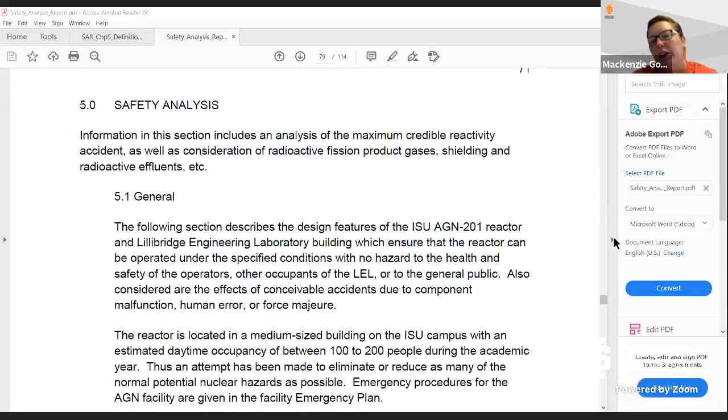Okay, so let's talk about SAR Chapter 5. A lot of what we've already talked about with the safety analysis report is a whole lot of information that tells us about the reactor, about the instruments, about the physical location, and the geography and weather that affects the reactor. But the safety analysis report wouldn't actually be providing us an analysis of the safety levels of this reactor if it didn't look at accidents.

When a safety analysis report analyzes specific accidents, they have a criteria called the maximum credible. So what they're going to do is look at the typical types of accidents that affect reactors, and figure out which one is the most severe that is still likely to occur. So it's the maximum, but it's also credible. We're not going to imagine that instantaneously every safety system, every shielding system, and every passive safety feature we've put in the reactor just completely disappears, because they won't instantaneously all do that.

That's not credible. But we are going to look at the maximum of what can go wrong—all of the things that are active, for example, we'll say fail. And then we'll look at what temperatures and radiation releases we get, and that's our maximum credible.

For the AGN reactor, the type of accident that creates the maximum consequences is a reactivity insertion. For many other types of reactors, especially commercial reactors, there are multiple types of accidents that have to be analyzed. So there's the maximum reactivity insertion, or RIA accident—reactivity insertion accident. There's also loss of coolant accidents, LOCAs, that have to be analyzed. We don't have a coolant pumping system, so we don't have to look at a LOCA. We don't have any active water going out of the core to look at. So that's not a credible accident.

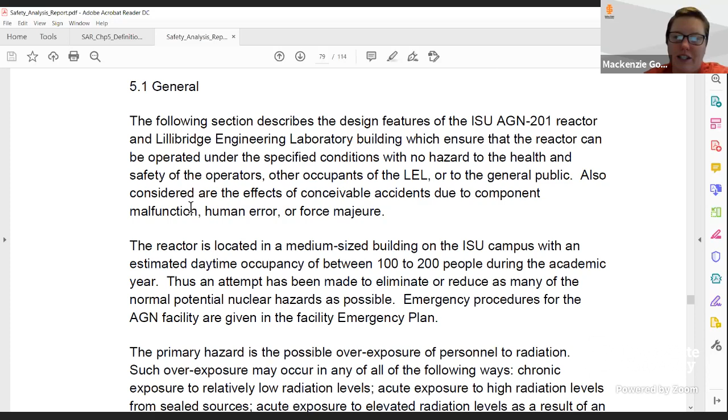So, this section describes the design features which ensure that the reactor can be operated under the specified conditions with no hazard to the health and safety of the operators, the other occupants of the building, or the general public.

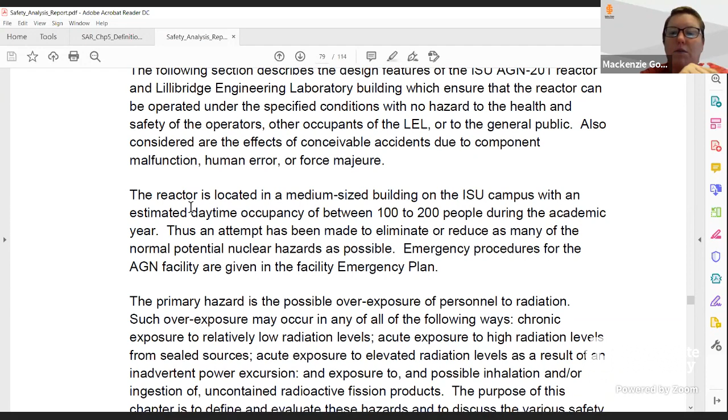As we start to get into our accident analysis, there are going to be certain assumptions. So this occupancy, 100 to 200 people. There's an emergency plan that says we will evacuate after a certain amount of time. There are going to be limits so our systems can detect reactivity being inserted too quickly or temperatures rising too much. As we start specifying the assumptions we have to have to ensure this accident is actually controlled, this is where we start connecting to our technical safety requirements, or the TSR.

Out of the accident analysis in the SAR, we're going to connect to the requirements we have to keep the system to that are specified in the TSR. So our SAR and TSR, even though they're separate documents, are related and create the safety envelope in which our reactor exists and operates. That's why we're talking about the SAR and TSR in the same session as we talk about the end of the SAR. Does that make sense?

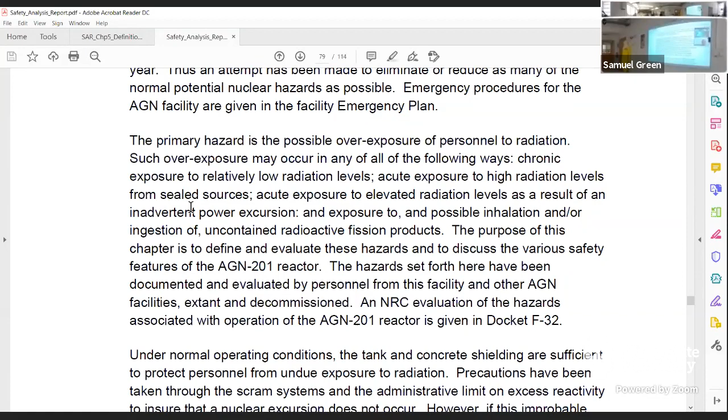Under normal operating conditions, the tank and concrete shielding are sufficient to protect personnel from undue exposure to radiation. So you can expect some requirement in the TSR that the tank, with its water and concrete shielding, actually has the right amount of water in order to operate the reactor. It's saying this item provides this protection, therefore in our TSR we have to protect that structure because it is essentially credited for providing safety, okay?

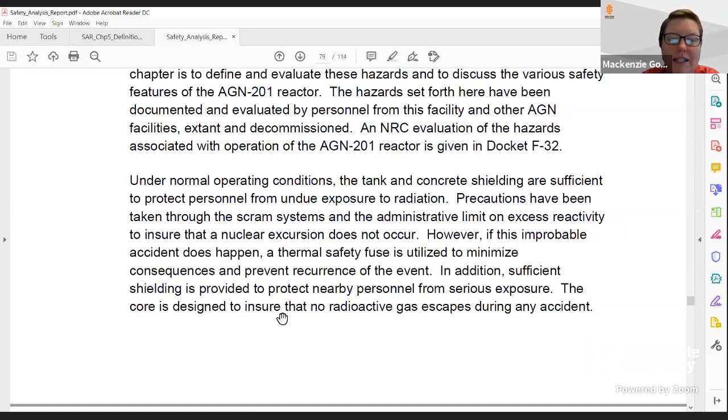The scram system and the administrative limit on excess reactivity ensure that a nuclear excursion does not occur. However, if this improbable accident does happen, you're going to rely on the safety fuse to melt, separating the core, which will prevent continuing reactivity insertion and avoid continuing or maximum consequences, preventing the event from recurring. In addition, shielding is provided to protect anyone nearby from serious exposure to radioactive gas during this hypothesized accident. So you should also expect in the TSR to see requirements about the design of the core tank to hold radioactive gas.

Back to some of this discussion on reactivity as we start talking more about reactor theory. In the text reading, I think Tucker does a really good job introducing reactivity in simple and straightforward terms, and the quiz up in Moodle talks a little about some of those questions. If you've done the reading in the first few chapters, chapters 3 through 5, he starts really talking about this—it's a really good introduction. We'll get a little more detail.

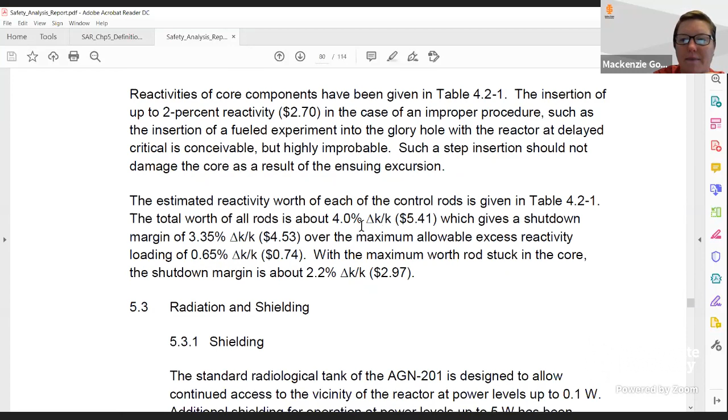The reactor physics portion of the NRC exam does require you to make some calculations with reactivity, so we'll get into that. Essentially, what it's saying is that the total worth of all the rods here is 4% delta K over K, and the insertion of up to 2% delta K over K, which would essentially be improper, should not damage the core as a result of the ensuing excursion, right?

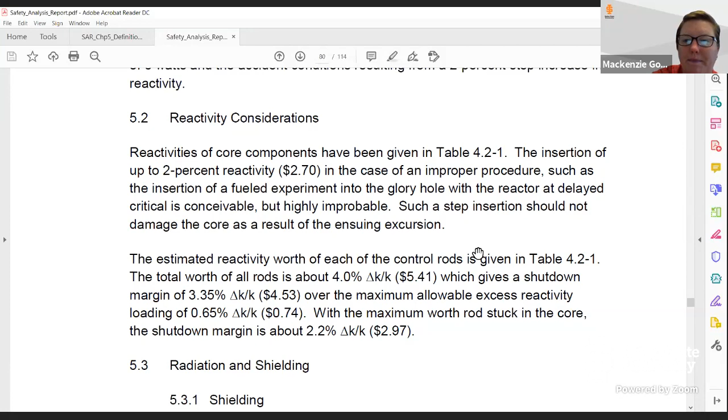So when we talk about the allowable excess reactivity loading, what we're saying is we're trying to prevent any part of the core from having enough reactivity to reach this 2% that we're talking about as our accident, okay? We don't have enough extra here. We have quite a bit more in all the rods together, but none of the rods get to move all at the same time, right?

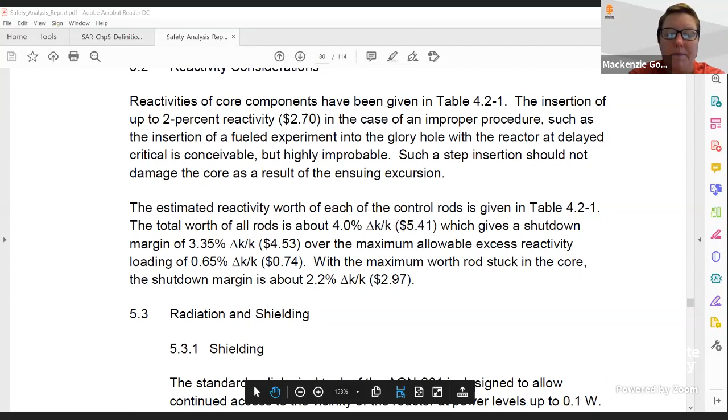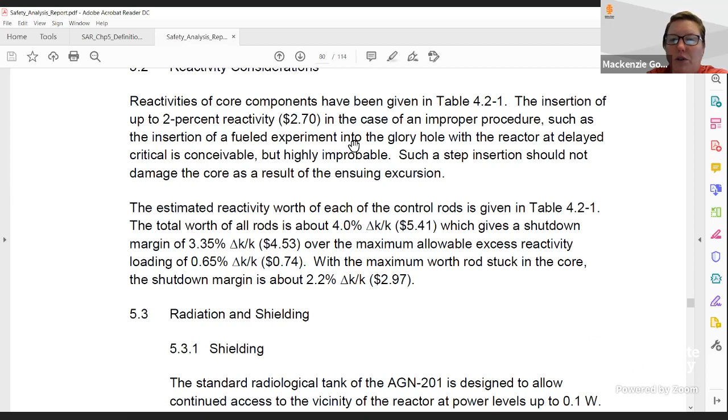As we talk about some of our TSRs and interlocks, we are preventing the coarse control rod, fine control rod, and both safety rods from all moving at once so that we're never inserting this. So it wouldn't be the control rods giving us that problem—it would be an improper procedure or a fueled experiment in the glory hole, right? Still improbable, but that's where we could get this reactivity.

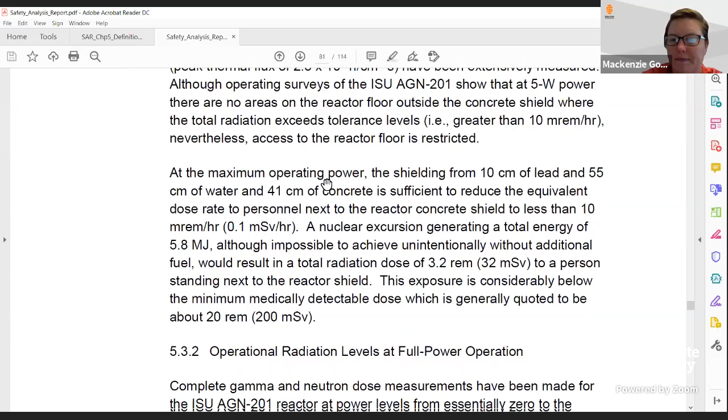When you guys read through this, did you have any questions about how the shielding and the reactor protects you, whether you're at the control station or in the building? Okay, I'm going to take that silence as you got it.

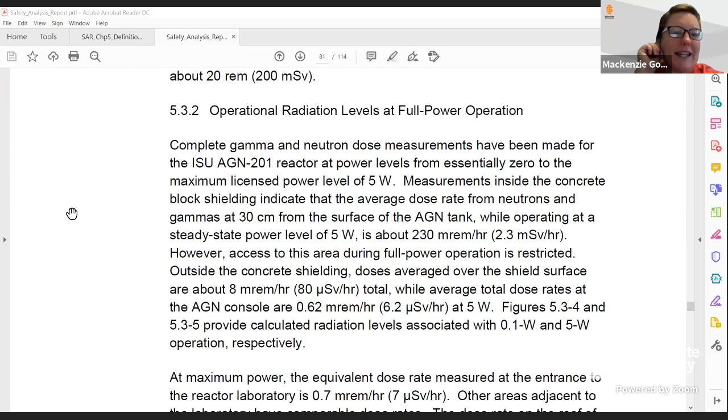So our maximum licensed power level is 5 watts. What is the dose we get while operating at that steady state level? At 230 millirem an hour. This is in the concrete shielding, right? We don't actually ever get exposed to that. We get exposed here at the console to this 0.62 millirem per hour. This 230 millirem per hour is why there's a high radiation sign that prevents people from walking behind into that concrete area.

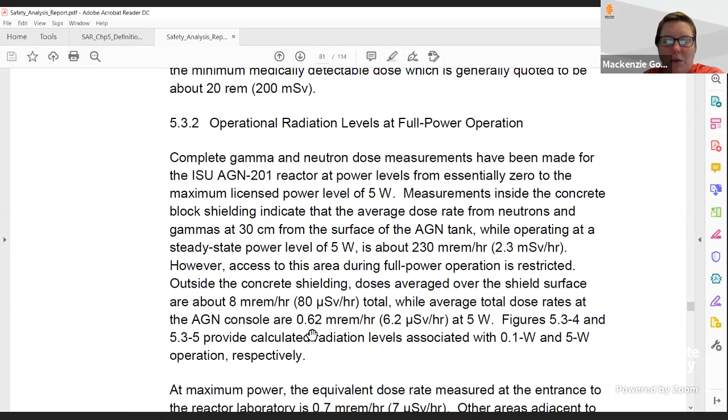Right outside the concrete shielding, the shield surface gets 8 millirem. So inside the surface, 230; on the outside surface, 8. That's a huge reduction that our shield gives us. And then, of course, once we're actually at the console, it's less than 1 millirem per hour.

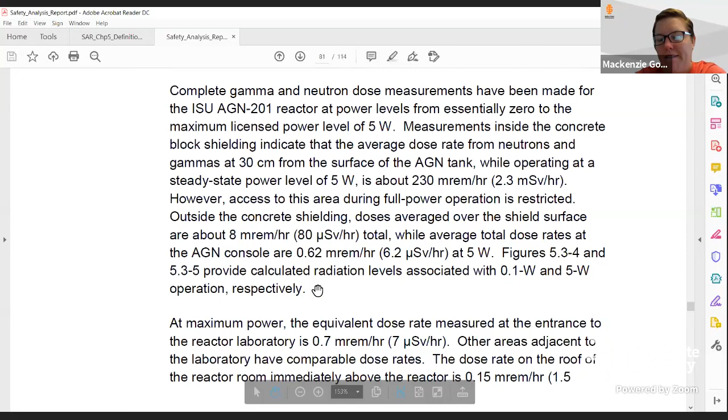What's interesting is that the entrance to the reactor laboratory has a slightly higher dose rate at max power. If you think about how that facility looks—Marcus and Sam, when you guys go in tomorrow, take a look at this. And Christy and Sue, the direction that the opening from the concrete shielding faces versus the complete wall that faces the console is why we have that slightly higher entrance dose rate. You know what I'm talking about, Christy and Sue? I think so, yeah. Okay.

Can you repeat what you were talking about just now?

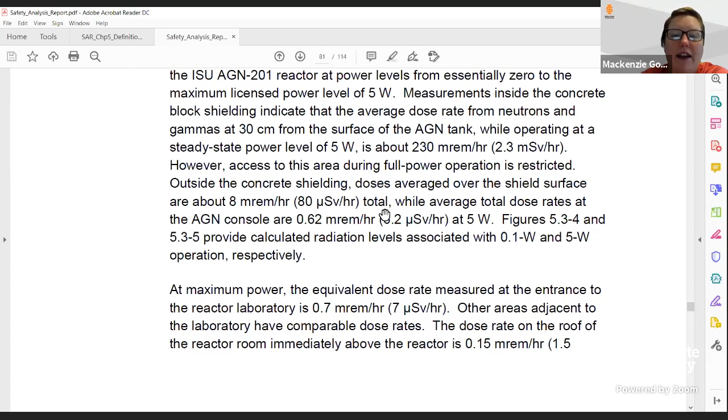Because of the shape of the concrete, that little puzzle entrance, essentially right where the high radiation rope is across, the opening actually points more towards the entrance. So you get slightly higher dose at the entrance to the reactor lab, whereas it overlaps and completely covers the console, so you have a slightly lower dose at the console. So when you guys get there tomorrow, Sam and Marcus, take a look at how that concrete shield wall is shaped, and you'll see why it protects the console more than people standing at the door.

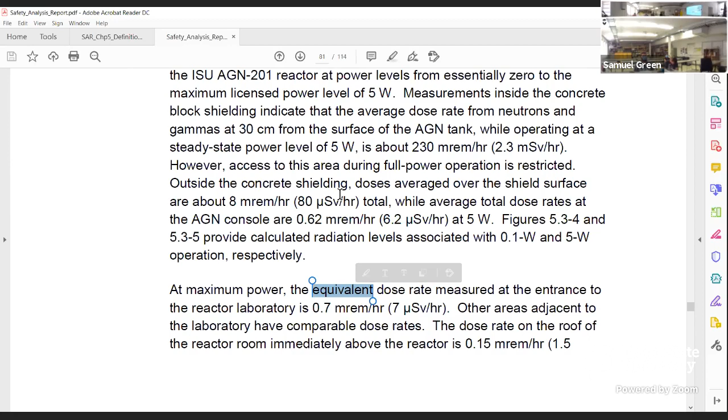When you do the walkthrough portion of your exam, where essentially you're taking the NRC inspector physically through the facility and explaining to them everything you know about the facility, this is extremely important information, and this is stuff that I highly recommend you have committed to memory.

Know the dose rate from the neutrons and gammas from the surface of the tank. That's at maximum steady state power of 230, and we restrict access to that area, so no personnel get that dose. Outside the concrete shielding, we're at 8 millirem per hour, and once we get to the console, it's at 0.62 millirem per hour. Because of the shape of our shielding wall, it's slightly higher at the entrance, but still extremely low at 0.7. Being able to explain that to the NRC inspector, why there's a high radiation boundary across the entrance to that shielding area, and why personnel are not allowed back there when the reactor is operating at high power, will be extremely important concepts to convey on your walkthrough exam.

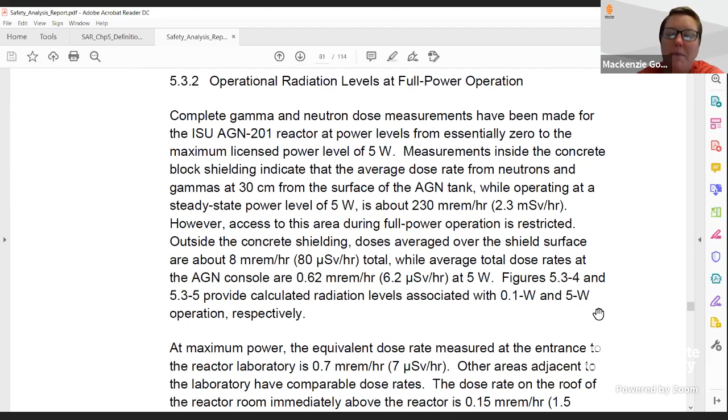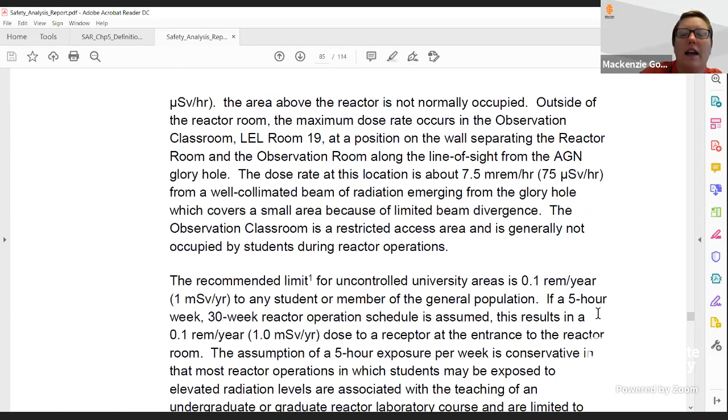Then it talks about some of the same information for the area above the reactor. The recommended limit for uncontrolled university areas is 0.1 rem per year to any student or member of the population. So then it talks about if you have a 5-hour week, 30-week reactor operation, the dose that comes off at maximum power that leaves the reactor lab would be essentially that 0.1 rem per year at the entrance to the reactor room. That's how we assure we don't ever expose normal students who aren't operators and aren't monitored for radiation to radiation levels.

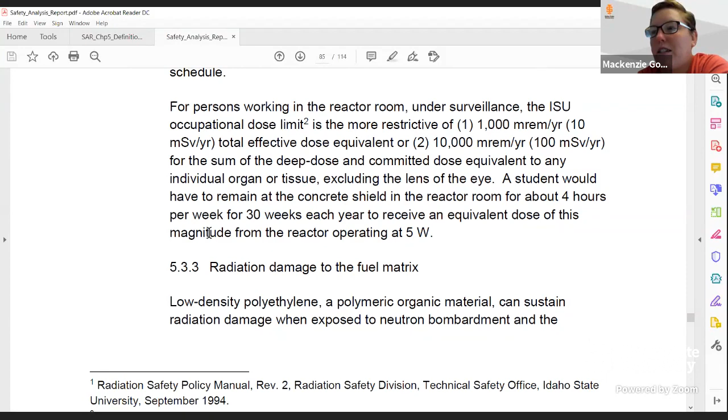ISU occupational dose limit, right? 1,000 millirem per year. So is this higher or lower than the DOE or NRC limits we've talked about in class before? Lower, yes, much lower. Even though we have that 5 rem per year that's the NRC requirement, we have a limit at ISU of 1. Do you guys remember what that's called when you have a lower limit set by your company than the limit that's legally allowed? Administrative control... yeah, it's our ACL, our administrative control limit. You also need to have that memorized. You need to know what our ACL is at ISU.

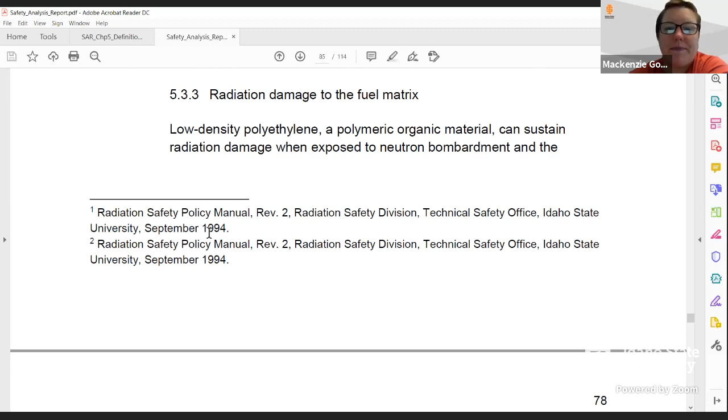One of the interesting things in the accident analysis is radiation damage to the fuel. We have low density plastic that reacts differently than the metal you typically see in most reactors. It can sustain radiation damage when exposed to neutron bombardment and radiation emissions from decay fissions. So Aerojet General Nucleonics put 50 samples of the core into this test reactor at Argonne National Laboratory, Chicago Pile 5, in a higher flux than we get at the AGN, for a week. Essentially what happens when that plastic fuel is damaged by radiation is the density is reduced and hydrogen is lost from that polyethylene matrix.

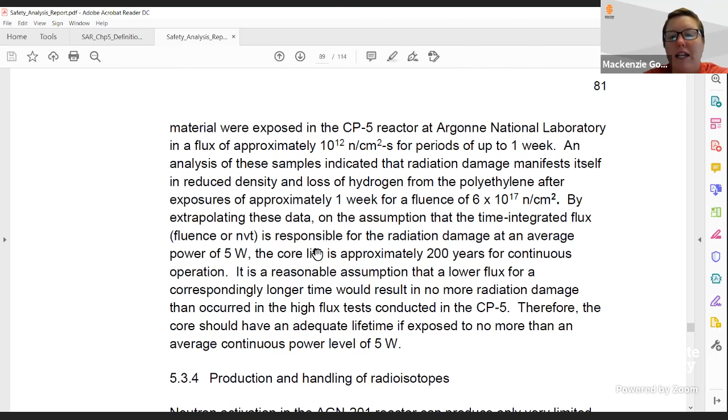However, if we have the reactor at that maximum power of 5 watts for continuous operation for 200 years, we still aren't going to create enough radiation damage in our plastic fuel to matter. So we could essentially put the reactor at its maximum power for the next 200 years, day in, day out, 24/7, and we would not be able to create the type of radiation damage that causes parasitic loss of hydrogen and reduction in density. It's very important that our density in our polyethylene doesn't change, because it's also our moderator, that hydrogen in the poly. If we have a higher or lower density, we're dealing with an under or over moderated fuel system, which changes how it's controlled, because if it doesn't have enough moderation, you're going to have too many fast neutrons. That density is important, and essentially, we're at such low power, radiation damage is just not a concern.

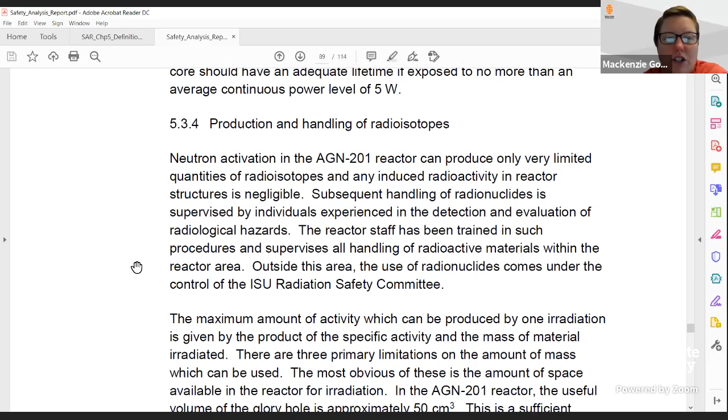I'll let you guys read on your own and review the production and handling of radioisotopes. There are also some procedures that talk about this handling process. Main radioactive gases the AGN 201 produces...

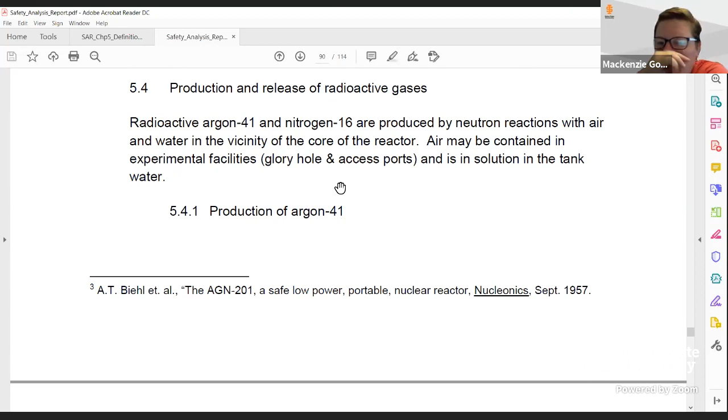Essentially, because the core is surrounded by air and water, right? The glory holes, the access ports, it's in solution with the tank water, and then of course there is the tank full of water. You're going to have a lot of neutrons that interact with those materials, and they're going to produce argon-41 and nitrogen-16.

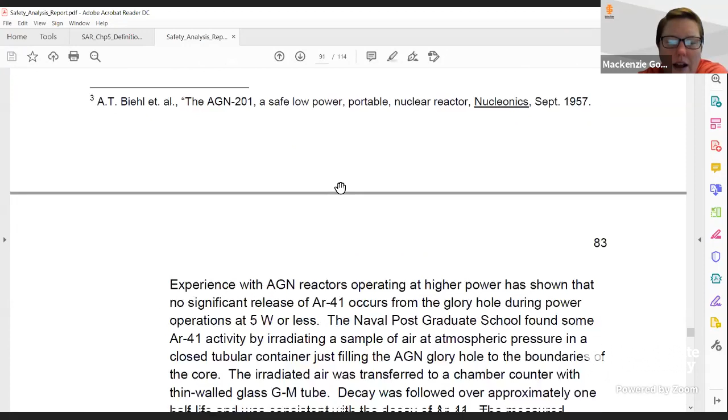We've talked in the materials class already about that production of nitrogen-16 from the oxygen-16 in the air. For the AGN, essentially argon-41 is produced, in insignificant concentrations because of the low power we're at, okay?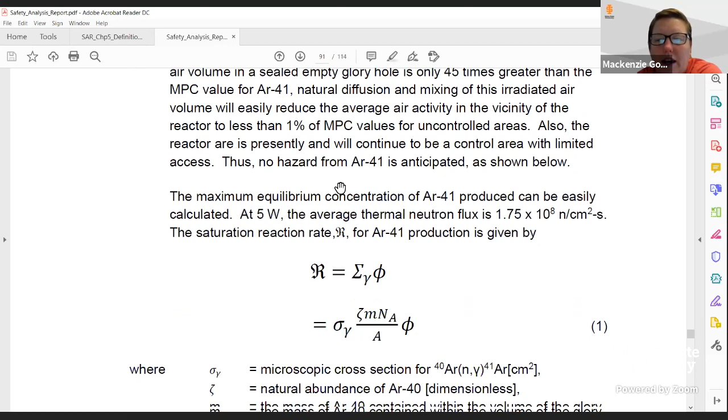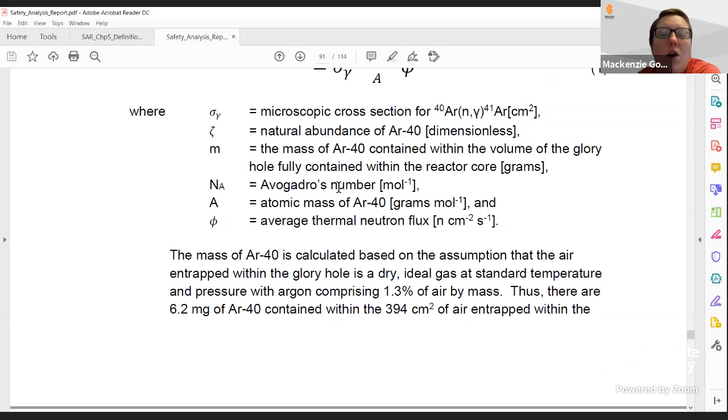This argon is produced from argon-40, which just naturally occurs in our atmosphere, right? So if our air is from our atmosphere, it's going to have some argon-40. That becomes activated by neutrons, becomes argon-41.

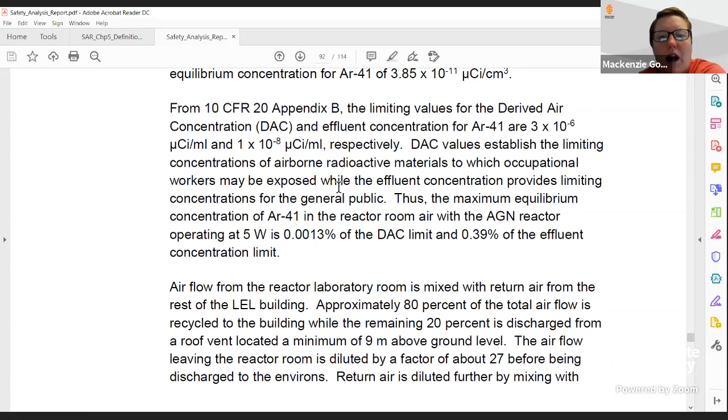And essentially, these calculations are showing how much is produced, right? And then based on the dimensions of the room, how much will be in that space. And then we go to 10 CFR 20, and we have our derived air concentration, right?

Essentially, we have a regulatory requirement to have below a certain amount of argon-41 in the air that we might be breathing in the reactor lab, okay?

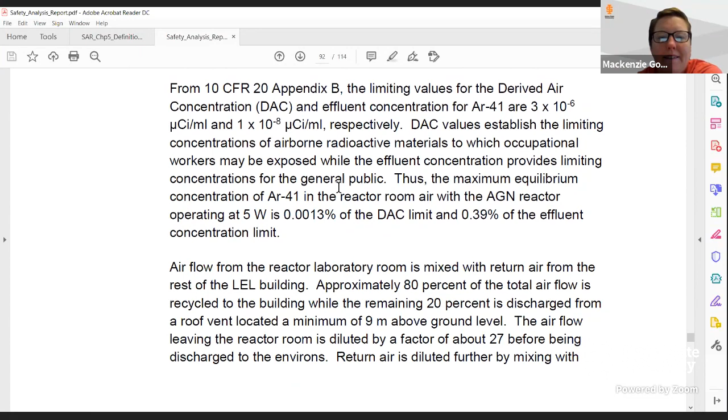And we are far, right? Operating at full power, we're at 0.0013% of the limit, okay?

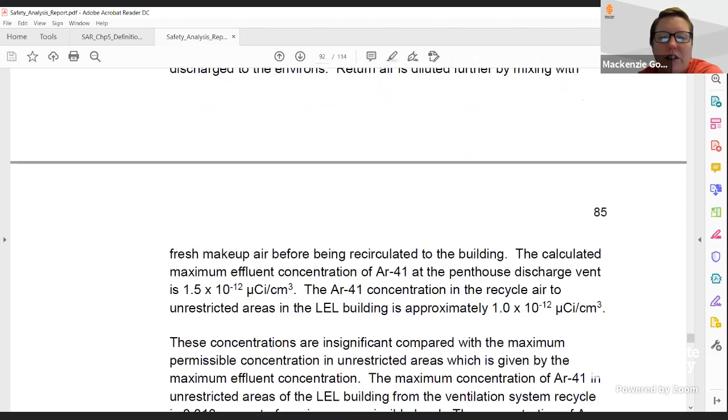And we keep that even lower by having return air from the rest of the Lillibridge building. So we turn over the air and dilute it in the reactor lab. So you guys don't have to worry about inhaling argon-41 or nitrogen-16.

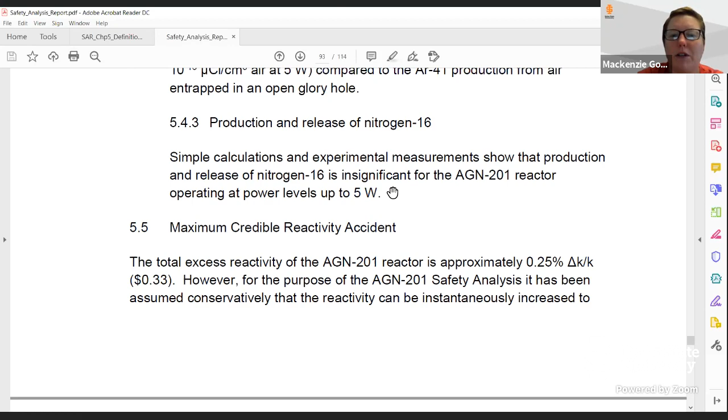Okay? I'm not going to go over the nitrogen-16 because we've talked about that in materials. But essentially their summary is it's insignificant because of our low power.

So what the maximum credible reactivity accident is that we assume that add 2% delta K over K with the reactor at a power level below its maximum, even though we've controlled everything in the reactor, so the maximum extra reactivity we have in it is 0.25%. We're assuming that basically 8 times that amount is available somehow in our accident, right, to make it conservative.

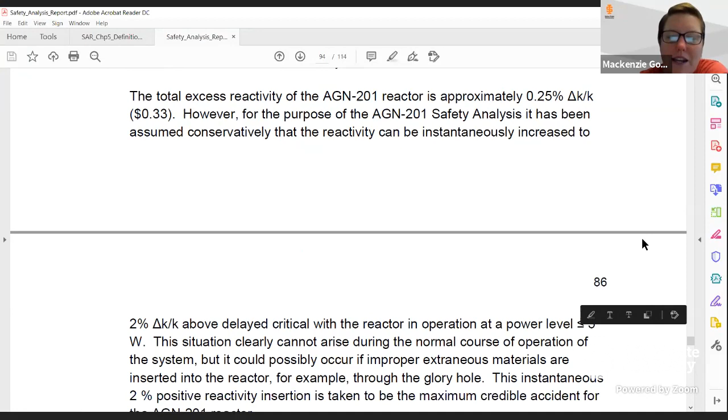The situation clearly cannot arise during normal operation, but improper extraneous materials being inserted into the experimental facilities could potentially lead us to have 2% positive reactivity.

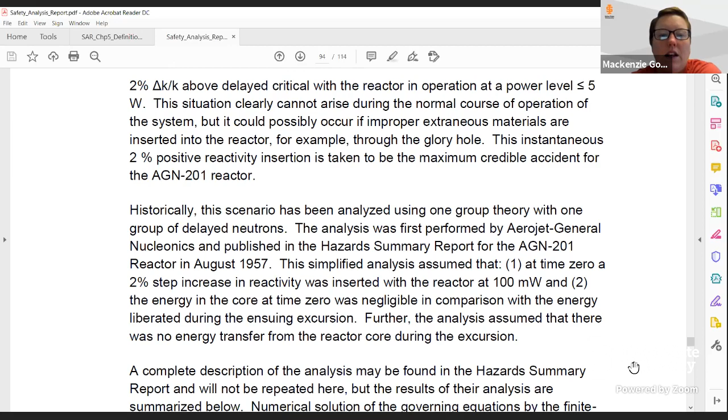This method of analysis, this is something that engineers have done in providing the design. And so what you simply have to understand as operators is that this is going to be prevented by controls on how the control rods have to be arranged, how much fuel loading they have, right? That's going to keep them below that 0.25% excess reactivity.

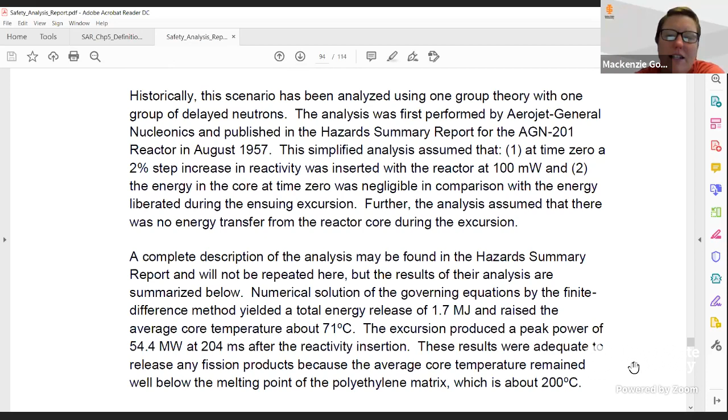And then controls on what can be put in the experimental facilities and how many experimental facilities can have material at a given amount of time, okay? Even with our maximum reactivity insertion,

essentially what we would get from this 2% instantaneous release is a very high power level rise from our maximum licensed 5 watts to a maximum of 170 megawatts.

However, once we get to that power, the temperatures that we're going to create are going to start activating our negative temperature coefficient of reactivity, and we're going to rapidly decrease the power level without operators doing anything. Just the physical design of the reactor is going to decrease that power back to about 800 kilowatts.

We're also going to have melted our thermal fuse, and so then we're going to slowly decay. That rapid power rise, that melting, and then that rapid decrease will all happen within about 300 milliseconds.

So even if as you, as the operator, make a big mistake and allow too much reactivity to be put into an item that's in an experimental facility, and you put that in and it's instantaneously inserted into the middle of the core.

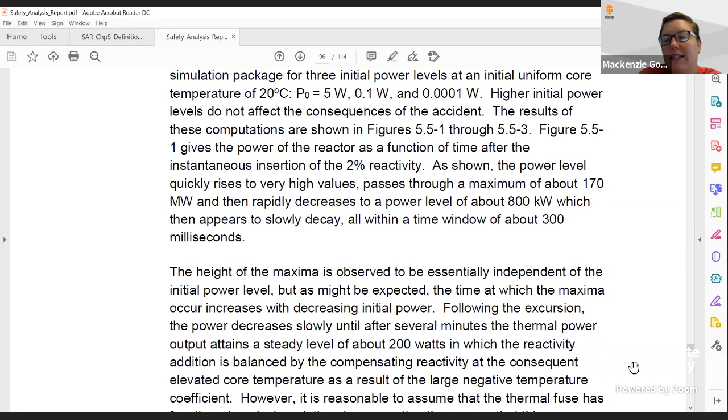So within a very, very short amount of time, that reactor is going to essentially use its inherent safe design in order to correct the accident that occurred. Okay?

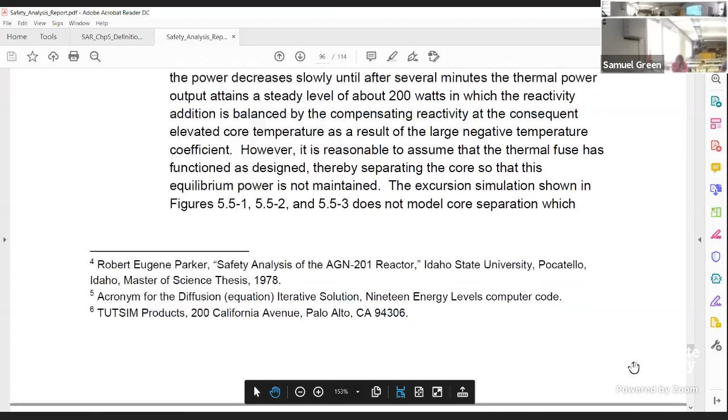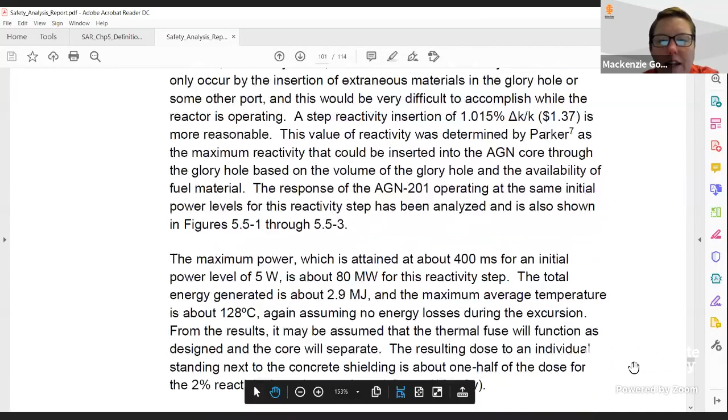This talks about the doses that would occur at that accident, so understanding the maximum dose rate. The maximum temperature we're going to get is 128 degrees C, so we're going to be able to melt that thermal fuse.

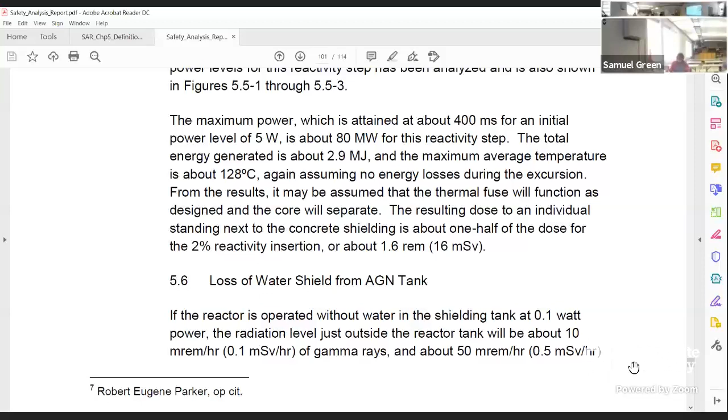Does that accident analysis make sense to you guys? Did you all do the reading before today? Are we reviewing stuff, or is this kind of new and you're going to go read the details?

I read to about here. And then, okay, I skimmed the rest.

What temperature does the, what's it called, the fuse melt again?

If you go all the way back up to chapter 2 and the list of properties, it lists the melting point. That polystyrene, I don't remember it offhand, but I want to say it was about 100. All right, thank you.

Look at that table to refresh yourself. When we were there yesterday, Jonathan pointed out that the water in the tank is almost where they couldn't run it. It's about 20 degrees Celsius, and he said that they can't run it if it gets over 25, I think is what he said.

Yes, so because of our negative temperature coefficient of reactivity, if the water tank is too warm because it's been warm outside, you can't start up physically. There's too much negative reactivity. On very cold winter days, when the water is very cold, it adds enough positive reactivity that we can exceed our excess reactivity limit, and we also can't start up. Physically could in that case, but we are administratively not allowed to. When the water is warm, we physically can't start the reactor.

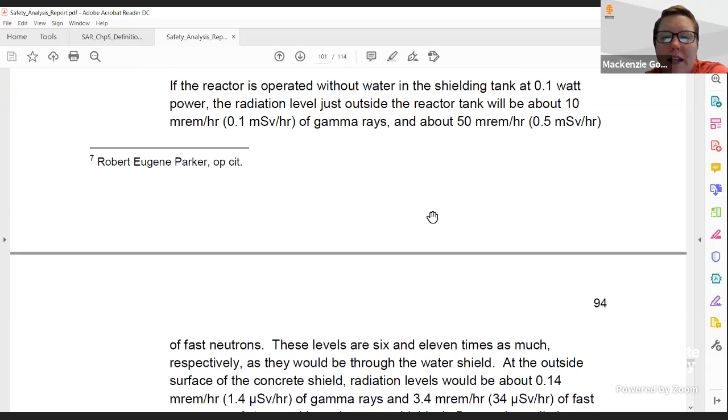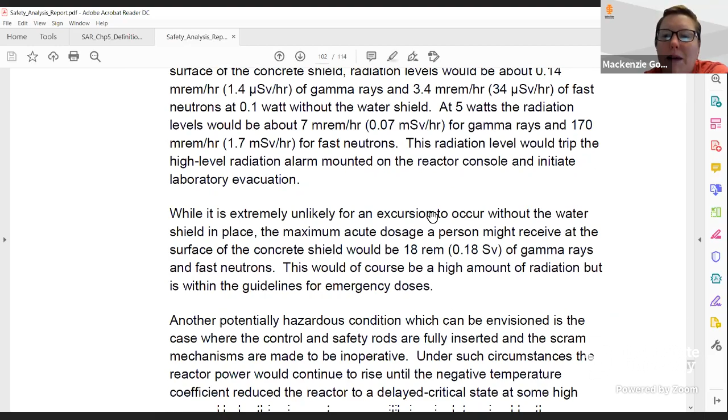Okay, and then it's going to talk about loss of water, right? So if the reactor is operated without water, the radiation level just outside the reactor tank will be 10 millirem per hour, 50 millirem per hour of fast neutrons, right? And these levels are 6 and 11 times as much as they would be with the water shield. So now it's going to talk about if that water shield leaked somehow, our maximum dose rate would essentially be an accident without that shielding, okay?

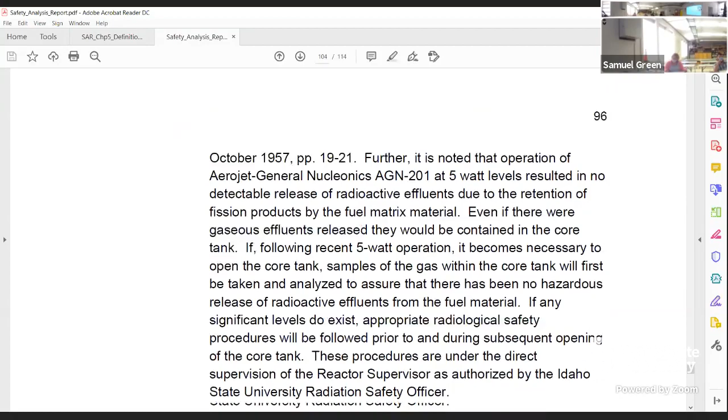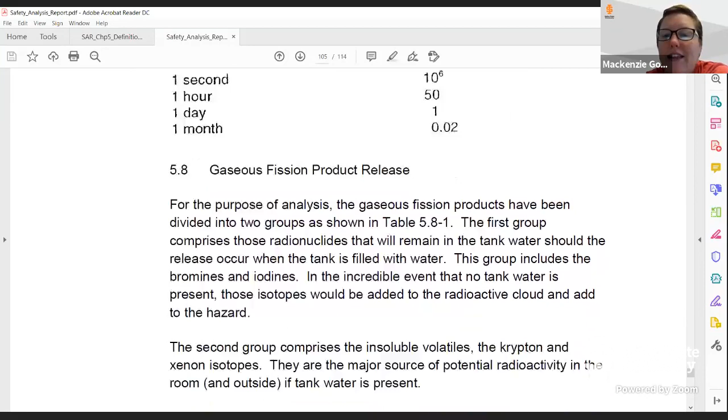So then it talks about the dose that would occur there. Then it's going to talk about the energy released, right? It's essentially just saying, hey, we produce this much energy, we make this much fission products, and then this is how much activity then from that fission product is contained in the core after these accident scenarios, which is important because we're going to need to re-enter the reactor at some point if we have an accident, right? And then it talks about the activation of the water and exposures inside the control room.

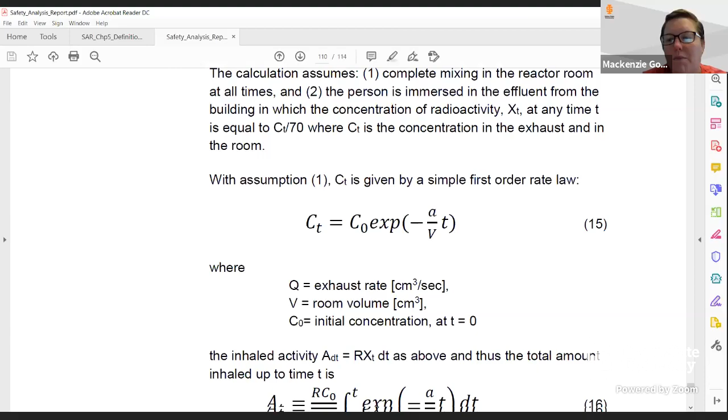So I'm not going to read all this to you guys. I just wanted you to get the important concepts from the accident analysis. All of this is discussing the dose that is associated with the accidents.

Then here it talks about designing our emergency procedures. We will look at the emergency procedures, but what's important to realize is that because we are producing such low amounts of energy and such low temperatures, honestly, it may not be obvious that our maximum credible accident has occurred. We could have this excursion and the core fuse, the thermal fuse could melt. And if we had a fault at the same time with our control console, the only way we would know that this occurs is our console telling us our power and temperature, right?

So there's no external evidence. We're not going to see the tank change. We're not going to see water boil through a looking glass. We're going to see indicators on the control console of power and temperature, and our radiation monitors are going to go off. But if we're having some sort of accident, maybe a natural disaster, and those systems happen to be out, those are the only indicators we have. We won't have any other way of knowing that this accident has occurred.

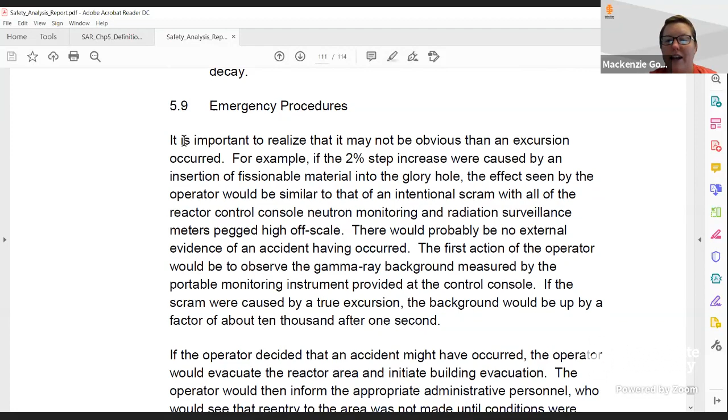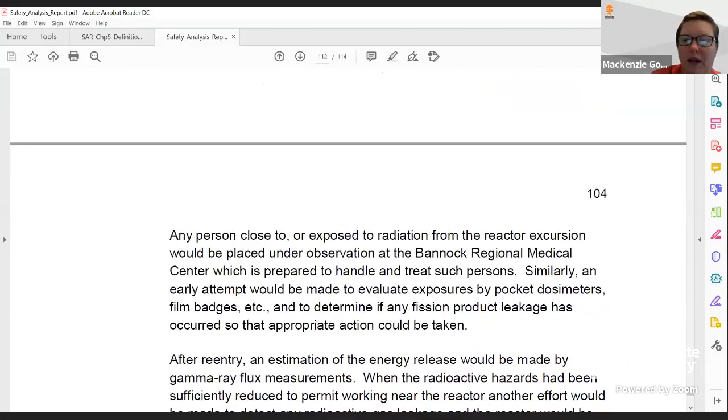So other than our radiation instruments going up, we have to be able to evacuate the area if we have reason to believe that this excursion could have occurred, right? So we have to have controls on putting that material in the experimental facilities. And then we have to have a complete facility emergency plan, right? This talks about some of the requirements for those, and we'll talk about that in more detail when we get to the emergency plan.

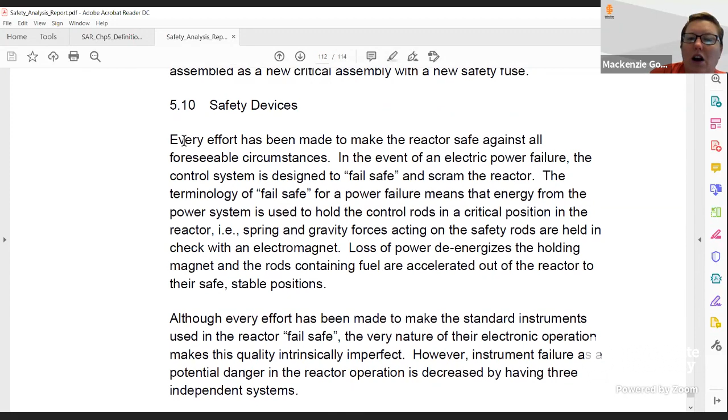Okay, here are the safety devices that are credited for preventing these accidents: water level, right, so that we don't operate the reactor with a low water level. We also have our thermal safety fuse, right? Higher uranium density loading in the thermal fuse ensures that it produces more heat than the rest of the core, right?

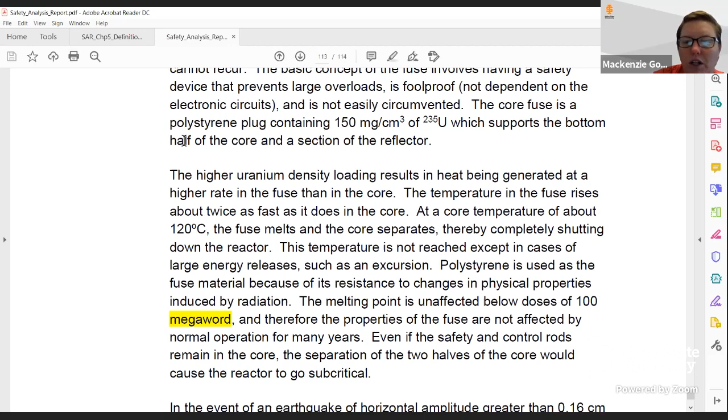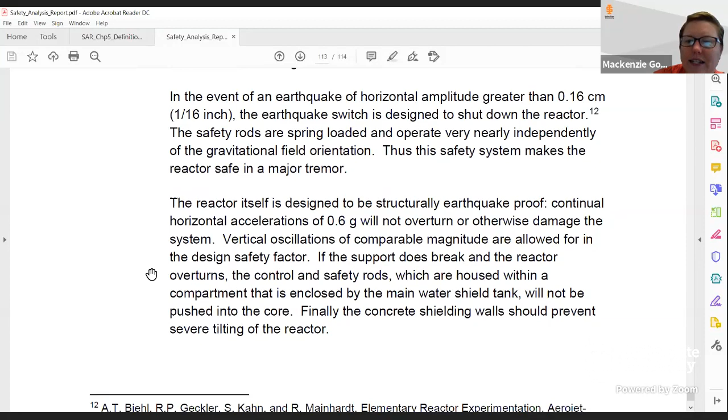I believe that is a typo, and that's why that's highlighted in yellow. And then it talks about an earthquake switch, which will have an automatic scram, even though the structure itself is designed to be highly earthquake proof.

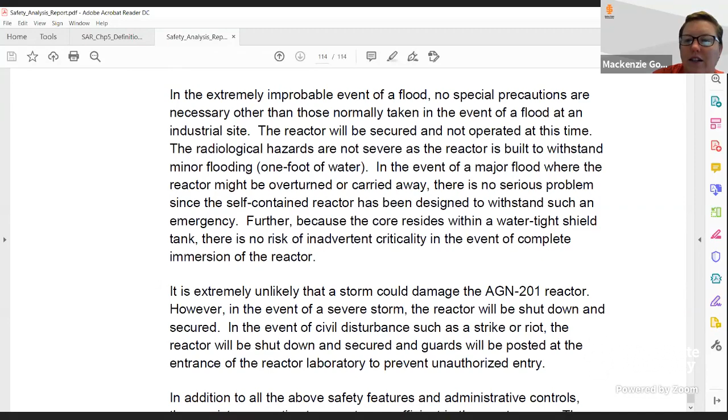It talks about, if there's a flood, there's no special precautions, just deal with the flood. It's not going to get inside our tank or do anything. And we're not going to consider a storm. And then the negative temperature coefficient. So knowing that our safety features are the thermal fuse with its lower melting point and its higher uranium density, our seismic scram, our water level, and our seismic trip.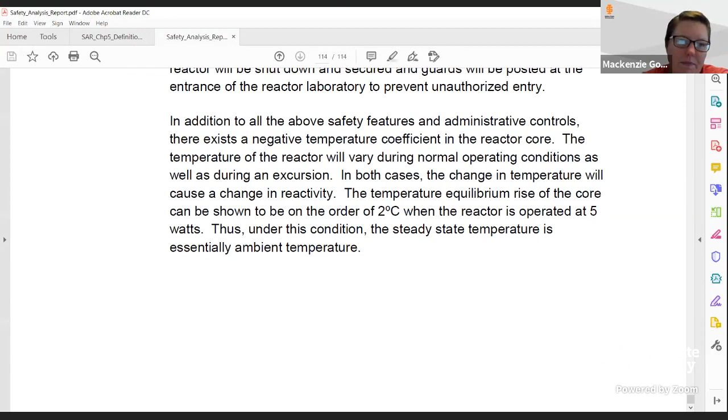These are the things that we're then expecting to find in our TSR as the things that would be controlled, okay? So now we're going to start switching to talking about the TSR. You guys see this? Yeah.

Okay, I can see it popped up. The TSR starts with giving some very specific, important definitions. I have never seen an NRC license exam that does not in some way ask you to understand the difference between a channel calibration, a channel check, and a channel test. So you need to know those definitions and you need to know them very well.

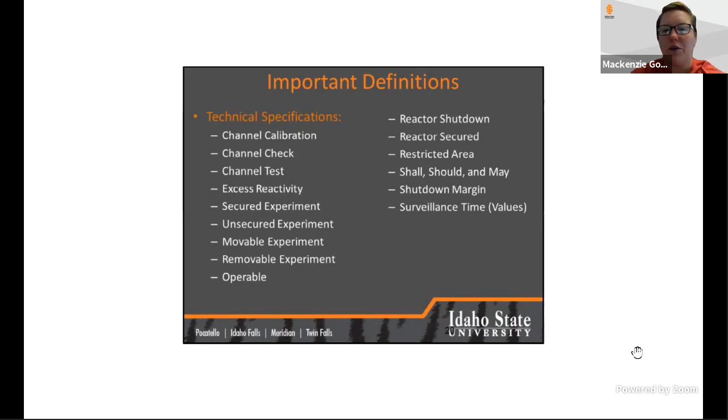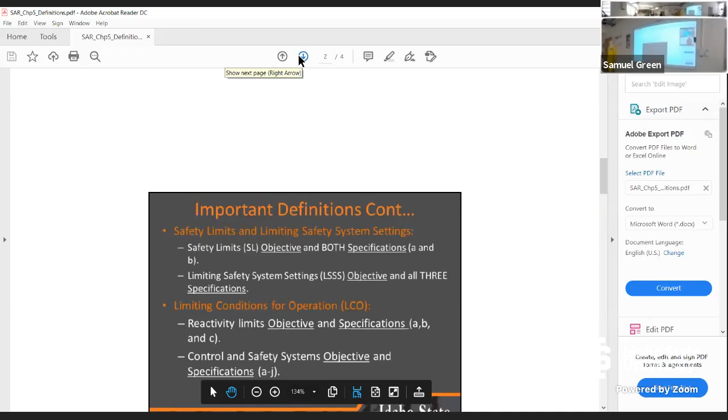There's definitions for experiment types. We're going to talk about excess reactivity more as we go through the reactor theory portion. You do need to know the definition for reactor shutdown and reactor secured. Okay, and then shall, should, and may.

Shall, should, and may are things that, pretty much throughout the industry, in our regulations, in our procedures, in our standards, they're going to be pretty universally using this definition. Shall is a requirement. When something says you shall do this, it means you have to do exactly this in this way.

Should is essentially a requirement, but it's not quite as strong as shall, right? Should says that this is the correct answer, but there may be exceptions. It's not absolutely a requirement. In general, because of how conservative the nuclear industry is, there will be very few times where something says that you should do it or should have it, that you don't. It is essentially a requirement in that way. It's just worded such that there's a little bit more other options rather than shall, which is an absolute.

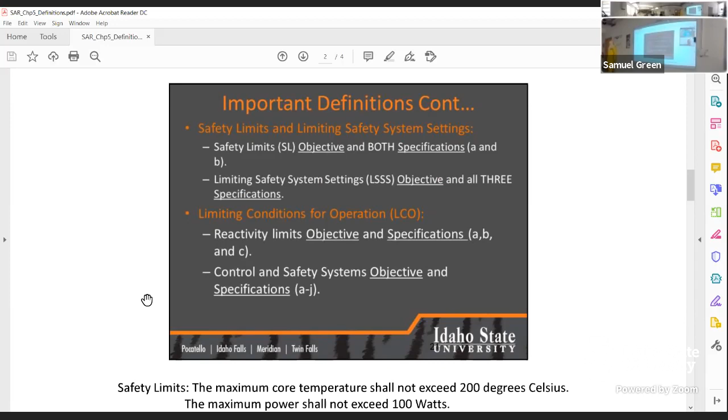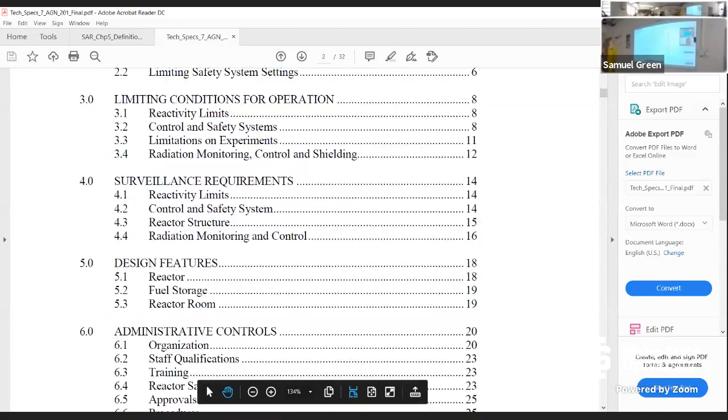Okay. Safety limits are, let's see, let's pull up the TSR here and let's look. So, they don't put them in here. So in this 10 CFR 50.36, it gives us a definition.

A safety limit and limiting safety system settings. Okay, safety limits for nuclear reactors are limits upon important process variables that are found to be necessary to reasonably protect the integrity of certain physical barriers that guard against the uncontrolled release of radioactivity. So the safety limit is the maximum that we're allowed to have for our process variables that are connected with protecting against uncontrolled release of radioactivity.

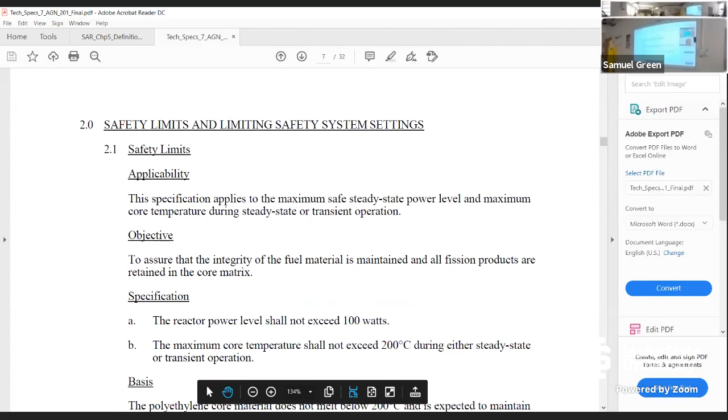So for us at the reactor, we're going to have in the TSR here a safety limit on the maximum safe steady power level, right? The reactor power level shall not exceed 100 watts. Maximum core temperature shall not exceed 200 degrees C, either steady state or transient operation.

Okay, oh look here, here's our melt. Well, that's the polyethylene of the core. That's 200, that's not the thermal fuse. Sorry, Sam, that doesn't answer your question.

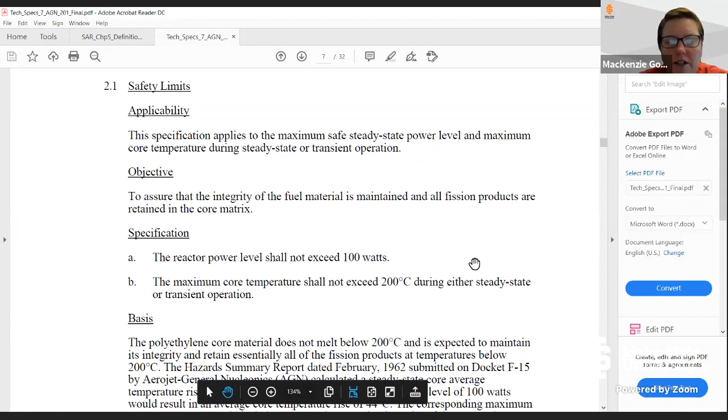But essentially, we have two safety limits, right? Reactor power level shall not exceed 100 watts. Maximum core temperature shall not exceed 200. Now, under that safety limit, we're going to have limiting safety system settings. Okay, these are the minimum functional levels that are put into our system for automatic protective devices, right? So if we have right here this safety limit that says 100 watts, 200 degrees C, we're going to have safety channels that initiate scram at the following limiting safety system settings, right?

So we're going to scram at a setting of 6 watts, okay? And then the thermal fuse is essentially our protective system for the temperature, and it will melt at 120. Oh, there you go Sam, there's your answer. The thermal fuse will melt at 120 degrees C. So we can't exceed 200 degrees C. That's our safety limit. Our limiting safety system setting is that the fuse will melt at 120. That's going to stop fission. That's going to stop the power from increasing.

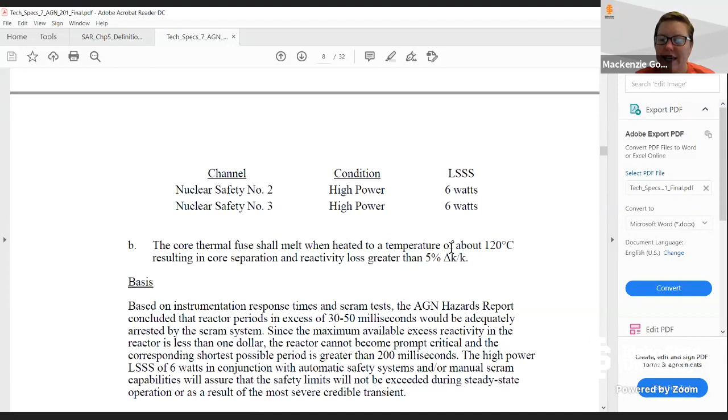That's going to stop the production of thermal energy, and that's going to reduce our temperature. We can't exceed this safety limit up here of 100 watts.

So we're going to have a scram that occurs automatically when our power detects 6 watts. And what's interesting is that limiting safety system setting is already higher than our licensed power of 5 watts.

So this is specifically talking about emergency situations, right? Our accident scenarios. We can't go above that 100 watts because we're going to generate so much fission that we'll be able to create a higher dose than we want. And so we're going to scram.

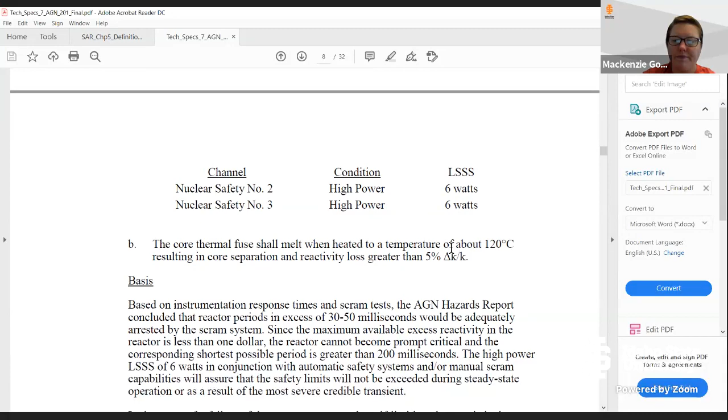We're going to keep going through these limiting conditions for operations, right? So they're going to talk about things that we limit on the operators, limits on experiments, how we get radiation monitoring and controls, and all of that is in the TSR.

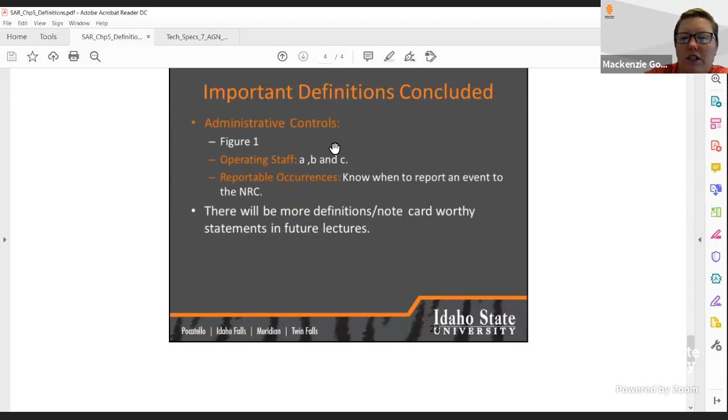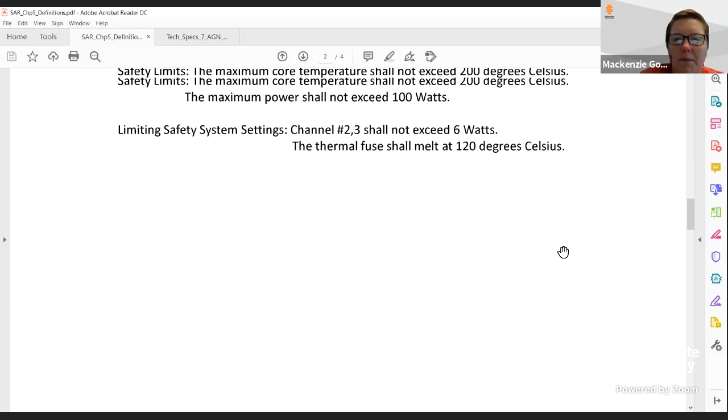Administrative controls are going to be the things that aren't physical. So we'll keep going through that as we talk about the TSR, but you guys have to know that safety limit and those limiting safety system settings. That's another must have memorized, can't even think about it, have to know it thing for operating. Not to mention the NRC exam as well.

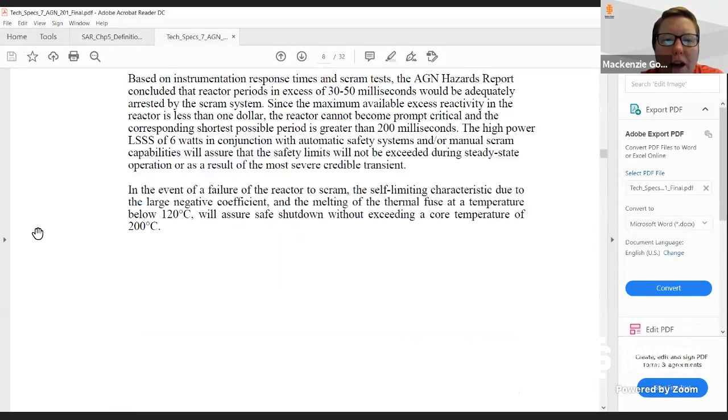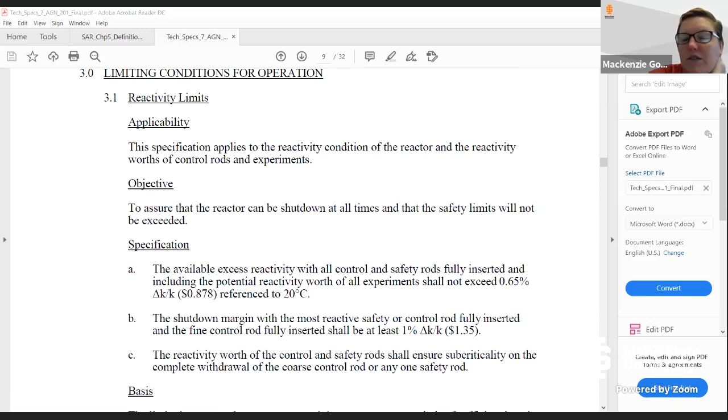I would suggest that you read this basis for both, because this explains the logic behind selecting that and why we do that to protect. And then we'll pick up next week and we'll keep talking about the TSR specification, the technical specifications, the limiting conditions for operations, and our administrative controls.

Any questions? No? Does that all make sense? Do you guys see how our accident scenarios that we analyze and our doses that we're allowed to have feed into what we choose as our limiting safety system or our safety limit, and then how we choose limiting safety system settings to ensure we never get to the safety limit? Did that flow pretty logically for you guys? Yeah.